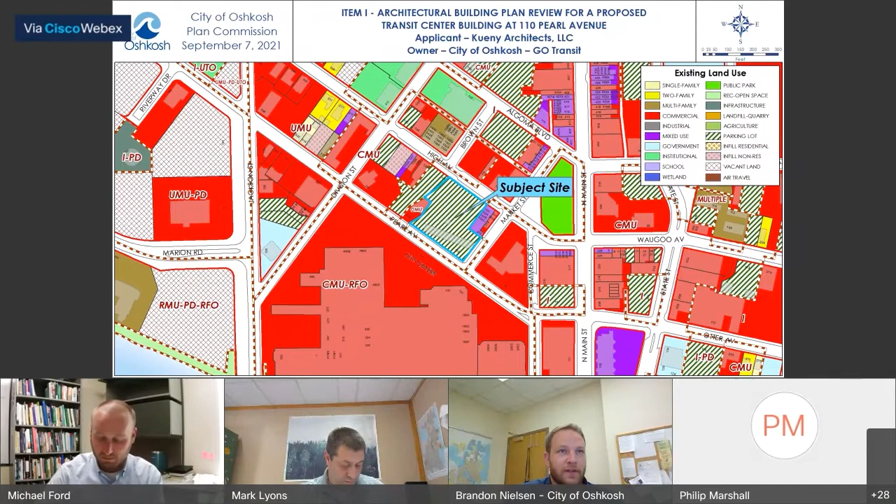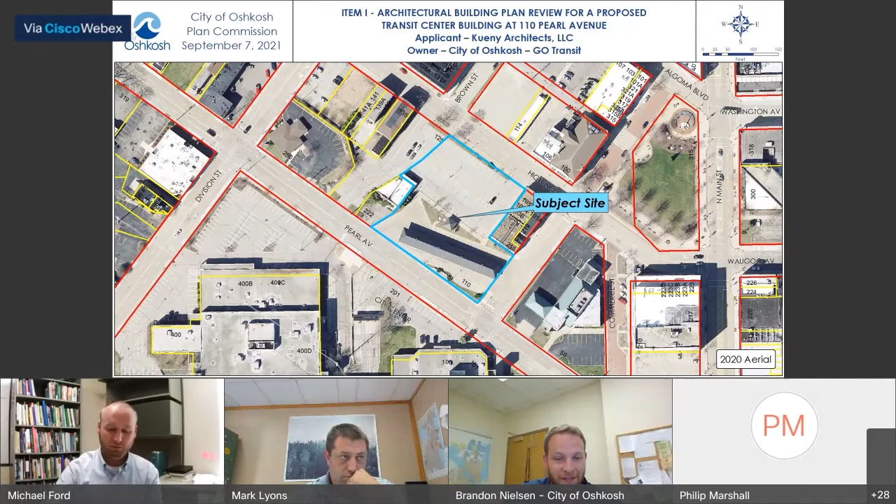Can you go to the next slide? We are looking here at the downtown transit center located at 110 Pearl Avenue. This slide shows you the subject site. Here's an aerial image of the area with the downtown transit center and the existing building that's there. In 1989, the city of Oshkosh constructed the current downtown transit center, which is the subject site we're looking at today. It's just south of High Avenue on the corner of Market Street and Pearl Avenue.

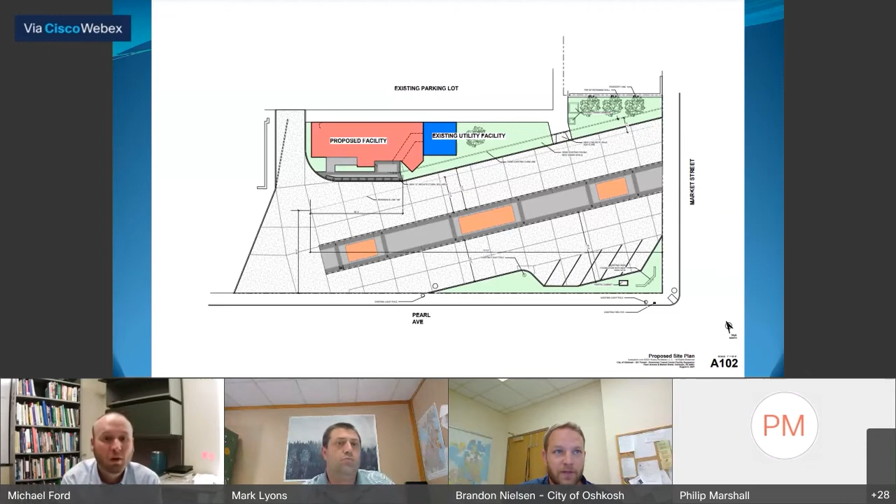The current building doesn't provide public restrooms, staff break rooms, or fare kiosks, and the new building we're looking at today provides all of those things. If you remember, on August 3rd, Plan Commission had a workshop with the architect and was supportive of the project. Now the applicant is requesting the formal architectural review for the proposed building.

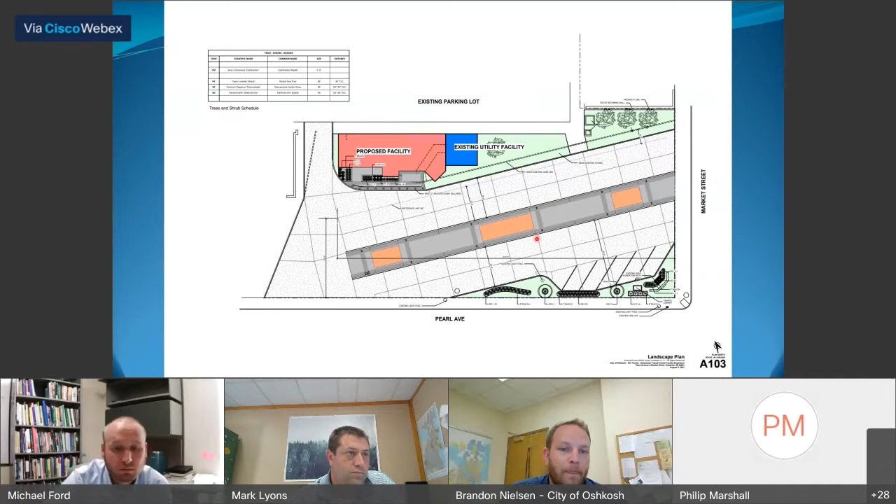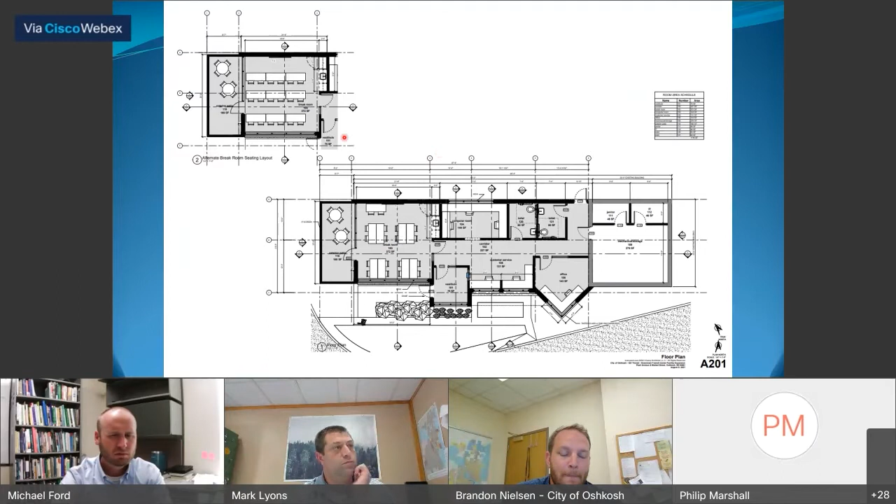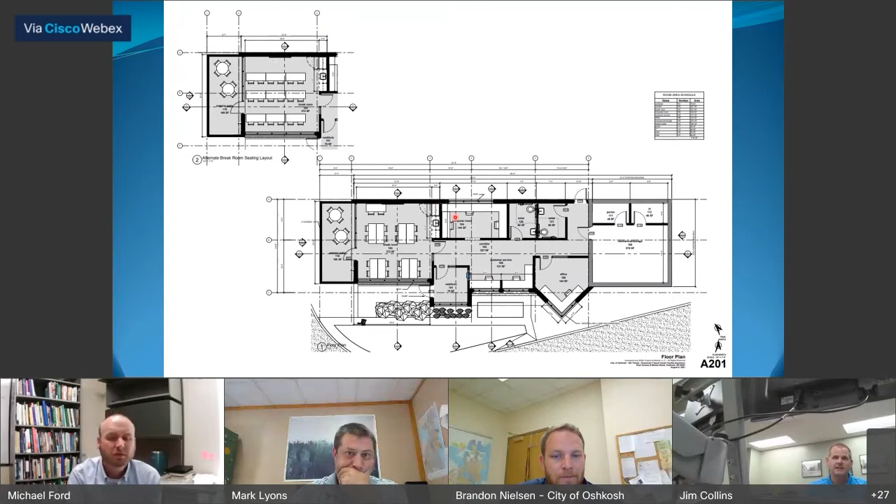Next slide. I've got John from Kueny on as well, but I just want to clarify they're not public restrooms, just 2 single-user staff restrooms. When we get to an expansion of our transit facility, that's something we'll evaluate again at that time. But with this, it's just not large enough, and there were some public safety concerns since this is such a small addition, to be able to have a safe area for that.

So currently it's staff restrooms and a little bit of break space, and then we'll have a customer service window area at the front. I just want to clarify that, because I know one of the reports misrepresented that as well. This building is a staff building, other than the customer service window. At some point in the future, we're still planning on having more of a public facility when we have more space available.

Thank you. I will make sure the staff report is updated, and if you could go to the next slide, please.

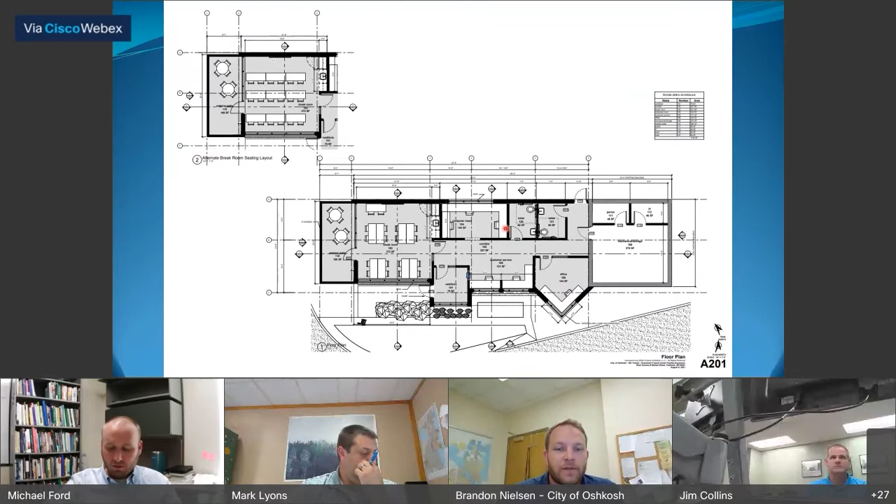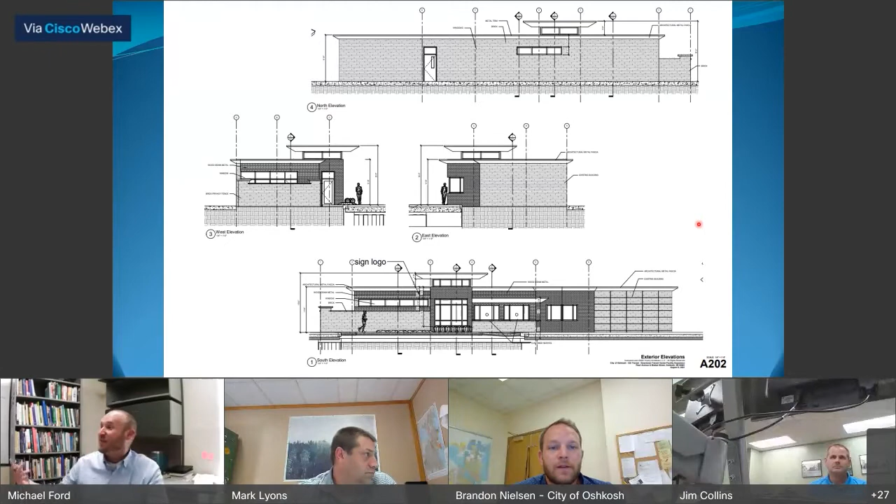So here are the building facades, showing mostly brick masonry units. The majority of it is meant to match, as close as possible, the existing brick from the downtown transit center. There are some color alterations of different masonry brick on different facades.

And the rest of it is mostly glazing. The architect was proposing a rubber low slope roof with aluminum trim to be silver in color. And again, if you remember from the workshop, they were going to apply some paint to the addition to the existing transit center to match that trim.

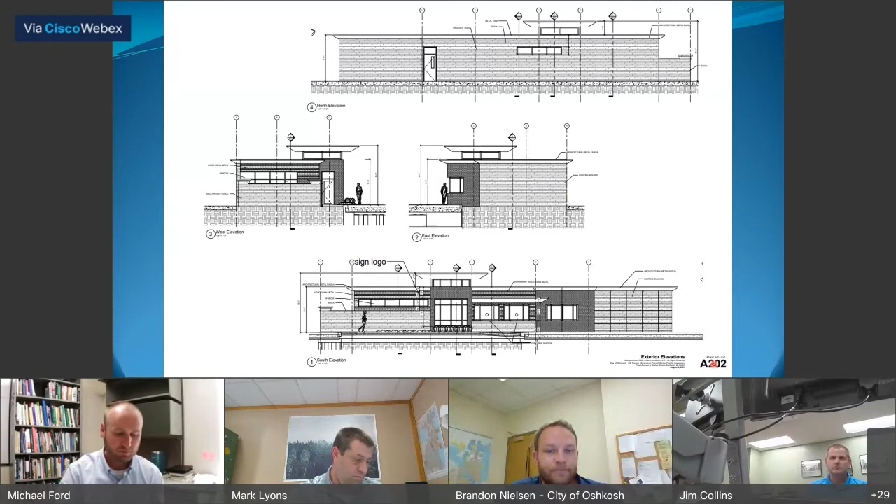Next slide. These are just some three-dimensional images. This one and the next slide are somewhat from the same angle, to get an idea of what it may look like.

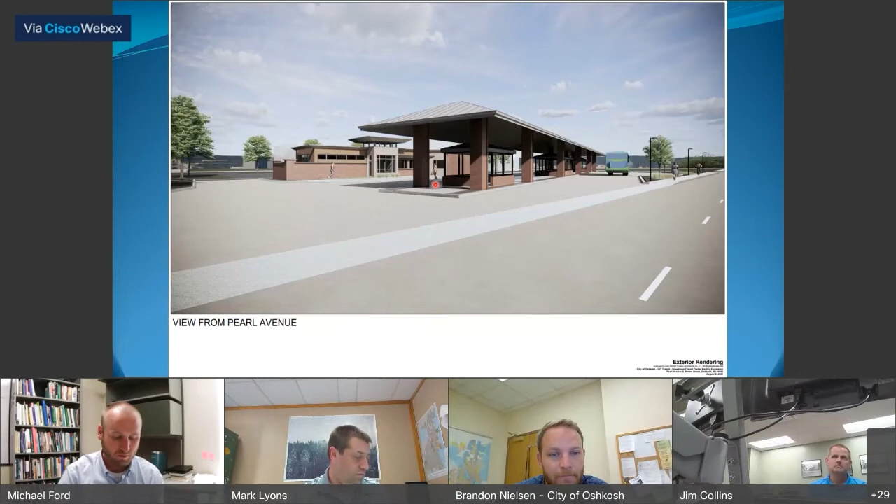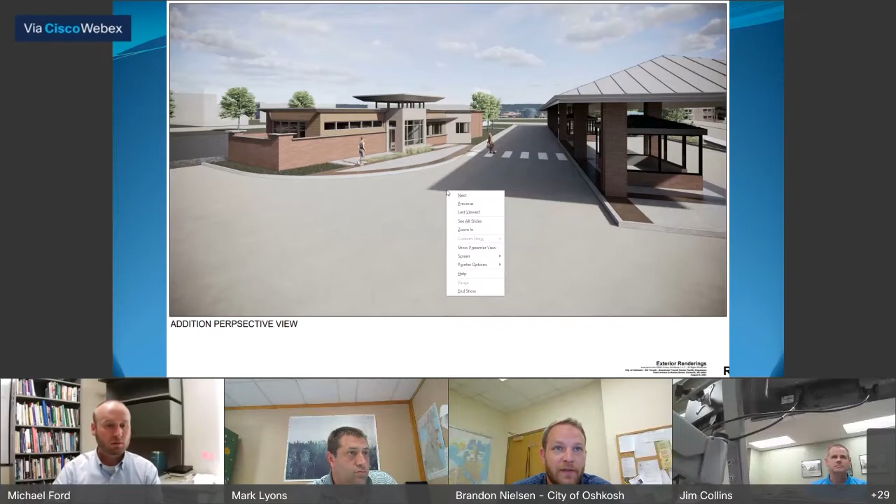And with that, staff believes that the new transit center building will not have a negative impact on the surrounding area, and the structure will be visually harmonious with the intended character of the general vicinity. Staff recommends approval of the architectural design of the transit building as proposed.

Thank you. Are there any technical questions from Planning Commission? Looks like I see Margie.

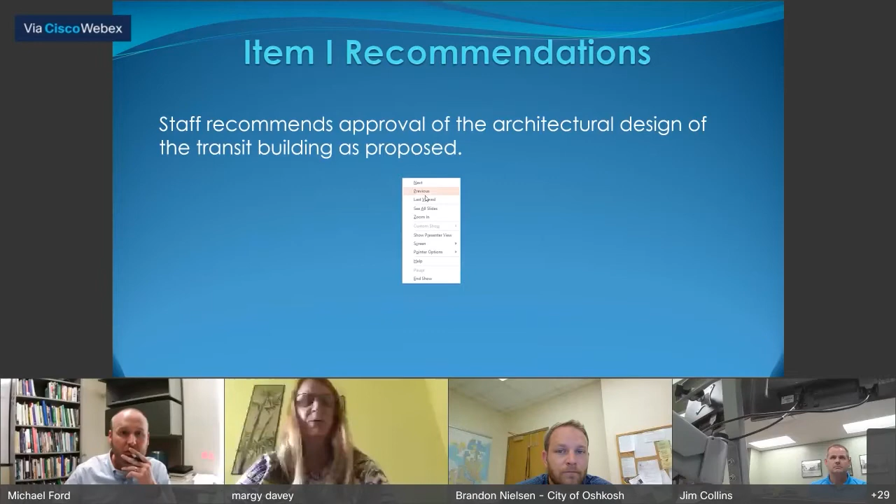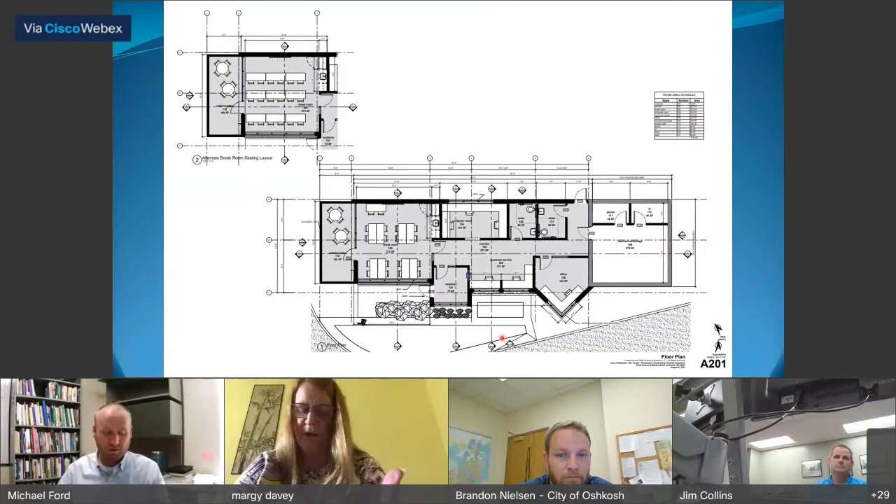Thank you, Mark. Yes, my question pertains to the landscaping that was called out in this. I believe they're showing maple trees, and I was curious if the planning department shares that page we have in the zoning that says there's some preferred trees that we don't use. Because six or seven different types of maples are listed in there, I just wanted to be sure the city forester or somebody was involved with choosing the landscaping there.

Yeah, during final site plan review, they'll have to specifically call out what variety of maple, because you are right. For example, autumn blaze maple are listed as overplanted and are not recommended. So when we get to that final step, they will have to specifically call out the exact species being planted. Okay.

Are there any other technical questions? It doesn't look like it, so we'll take a statement from the applicant.

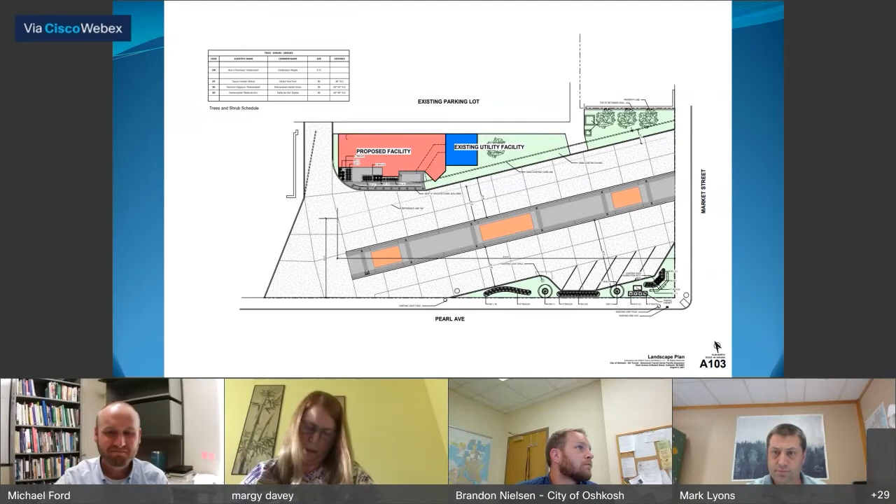So either Jim or John, either of you would like to add any comments? Yeah, Jon Wallenkamp, Kueny Architects. Just everything's been touched on. If there were any other technical questions, we're here to answer them.

Our goal is, as mentioned, to kind of enhance the building with the existing structure. That roof is pretty heavy on the existing structure, so that's really the reason for changing the color of that main roof. And we will for sure address the landscape species. But other than that, it's pretty simple. We're here for any questions.

Yeah, I concur with John if you have any technical questions for him, but just from a staff or transit perspective, we're excited about this. I know our staff and drivers are really excited about having at least some break room space down there, where they currently do not have any.

But I think this is also an opportunity for our passengers and the public as well, because it is going to update that whole area and make it look a lot nicer, as well as eliminate some tripping hazards and improve the safety of that area with upgraded lighting, improved pavement by replacing or removing those pavers, and doing some repair to the concrete. I think it's just going to be a real nice upgrade to that area.

And then, like I said earlier, hopefully at some point in the future we can do a little bit of an expansion and offer some more space for public waiting, and then reevaluate the public restrooms and things like that at that time. But we're excited for this. I think it's much needed and overdue, so we're fortunate to be able to do that at this time.

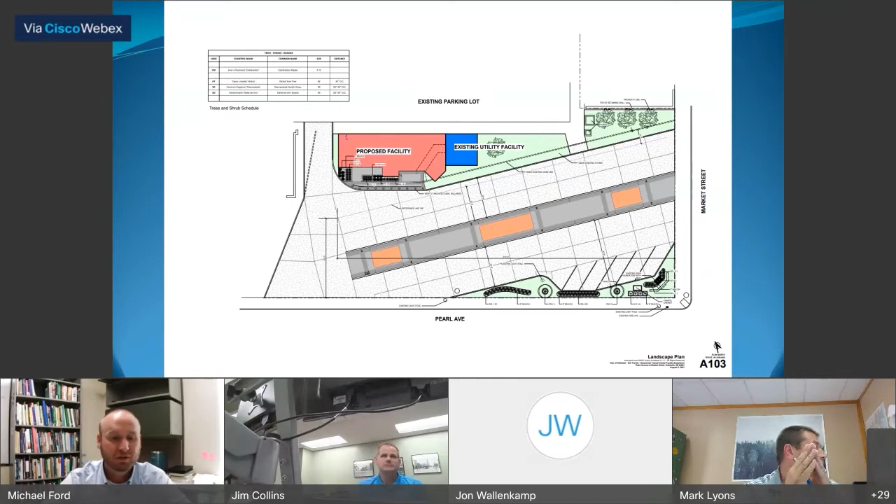Thank you. Any statements from the public? So just one thing to note, we do not use the chat for public comments. So if anyone from the public has questions or comments they'd like to make, now is the time. We are not able to use the chat to answer questions.

Doesn't look like there's any comments there. Is there a closing statement from the applicant? No, just thanks for everyone's time. Awesome. Thank you. Then the next thing we need then is a motion from the Plan Commission.

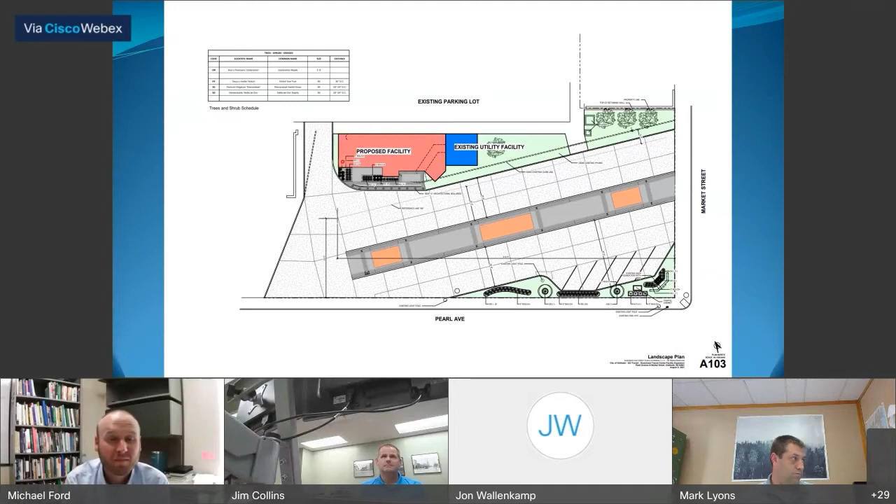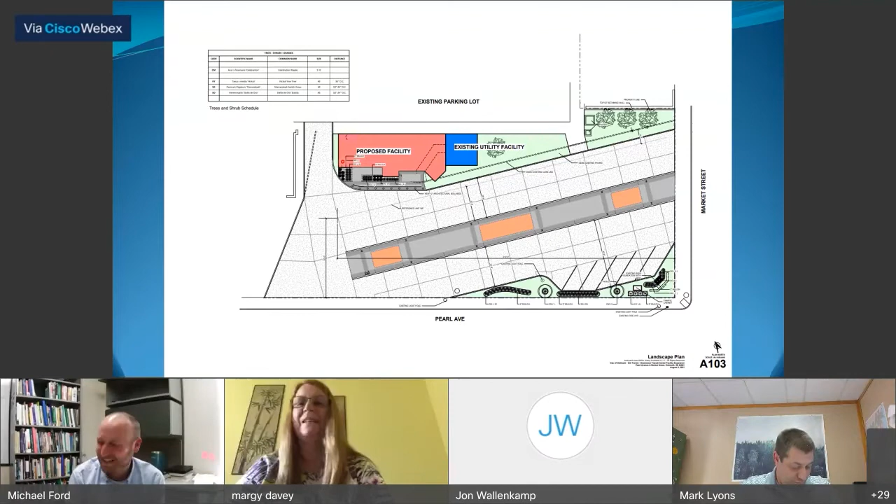I move to accept whatever it is we're supposed to say here as is, and that we do it. I second. So Margy, to clarify, Margy is motioning accepting the recommendations as stated in the staff report.

Is there any discussion? I've got 2 questions, and I'm not seeing where my hand raise button is. Go for it, Justin. What was the rationale for the limited initial phase and not including the public restroom and the other features that would provide a pretty valuable service to the users?

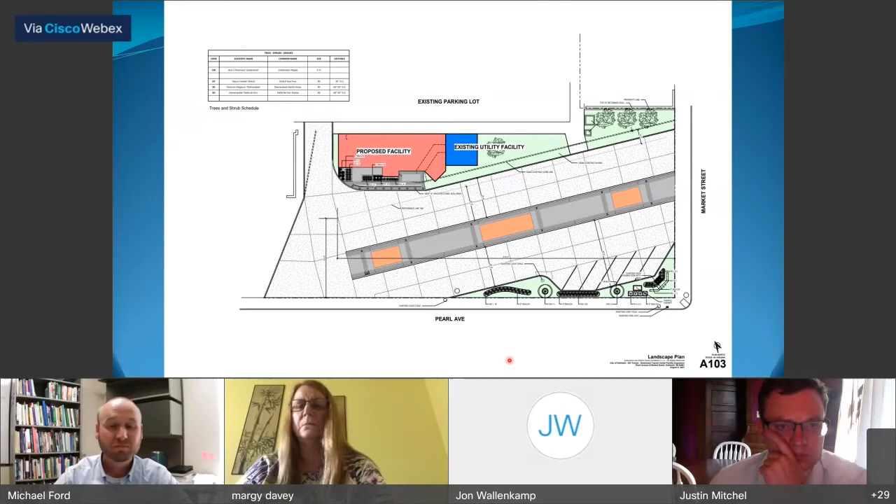I can answer, the limited scope is due to funding. We got a limited amount of ARPA funds, so this is what we were able to do on our current site. We're limited currently to our existing footprint. We don't own any of the land adjacent to there, so basically we're limited to what we currently have as far as a footprint goes. And specifically, that space constraint just doesn't allow us much room to do anything more than we proposed here. So I think that answers your question. I don't know if you have anything more.

Is there a staff restroom? Yes, there'll be 2 single stall staff restrooms currently. That's what they have there currently as well.

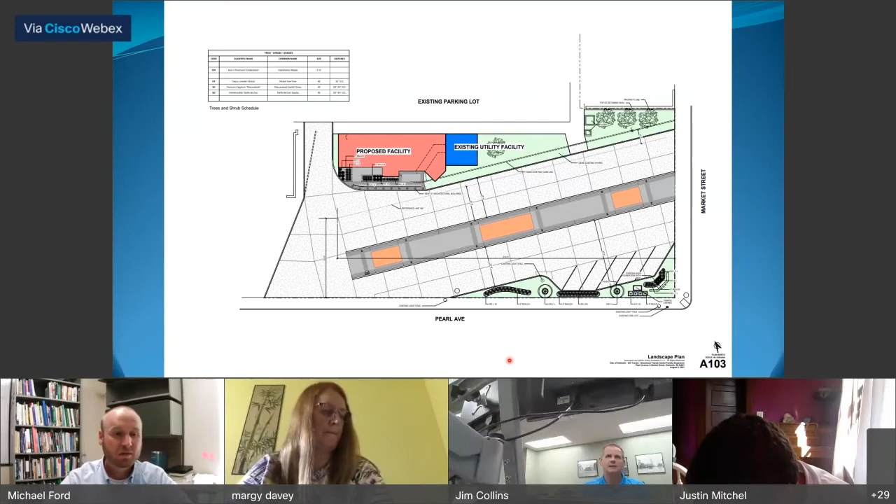Just at a minimum, I'd like to note that it's disappointing that that's not being included in some phase. And I know that was part of the initial discussion that we had, that there would be some public restroom features and whatnot. My other question is then, and if you went over this, please accept my apology, I had to re-log in. What was the user engagement for the development of this plan? Did we host sessions that were specifically targeted to users, or do we hand out material to users explaining how they can provide feedback and whatnot?

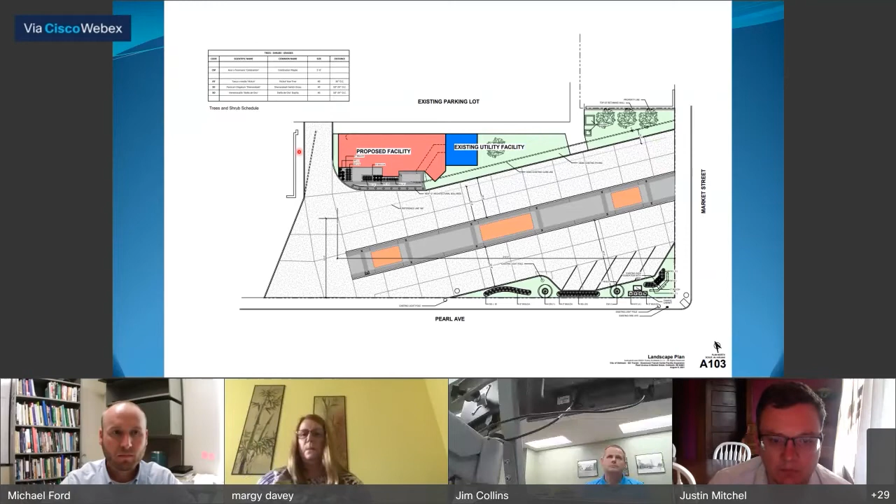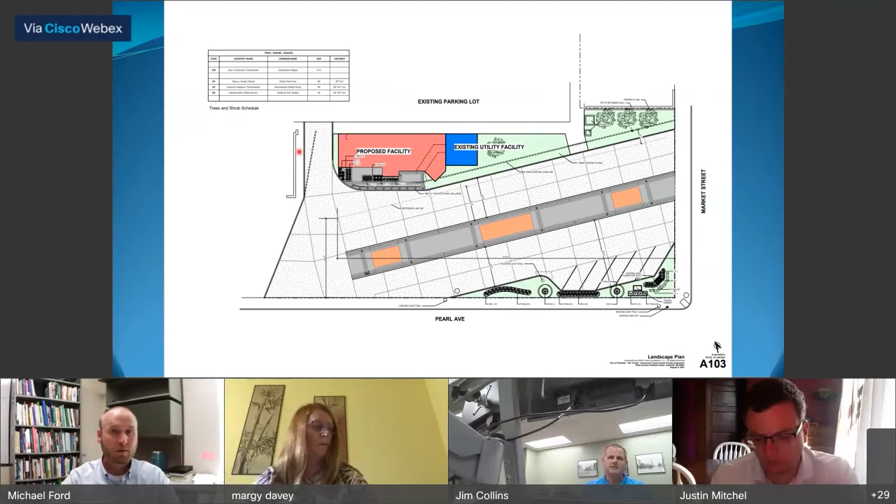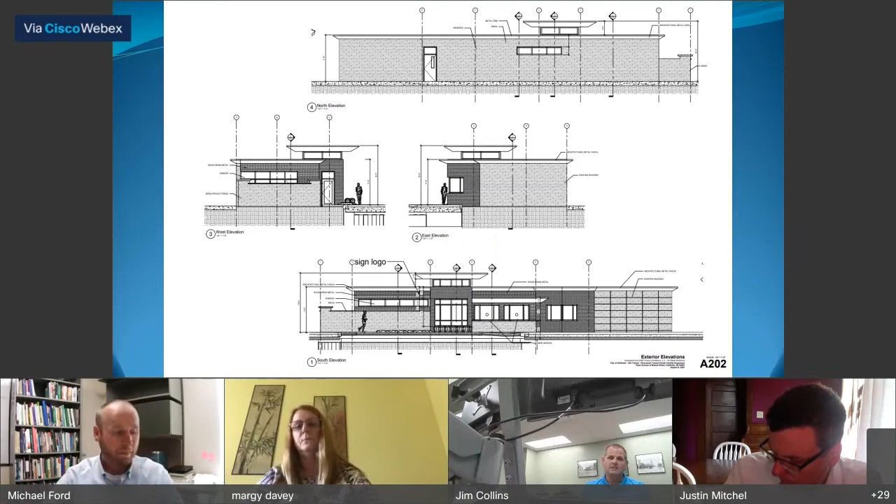Yep, so I think we're getting this confused a little bit. We did do a site selection study over the last 2 years. So there was a transit site selection study that was done, and that was prior to receiving any ARPA funds. But over the last 2 years, we had a company called SRF Consulting that did a site selection study. And at that time, we were looking at where, if we ever did expand, where would be the best location for that. So they looked at a number of different locations throughout the city of Oshkosh, not just downtown, had lots of stakeholder meetings, public meetings, and then also ultimately had the Transit Advisory Board and then council evaluate the recommendations, which were to stay on the current site due to basically cost considerations and the fact that any money we invest in transit has to be in use for 40 years as far as public buildings. So that was a 2-year process where there was a lot of engagement.

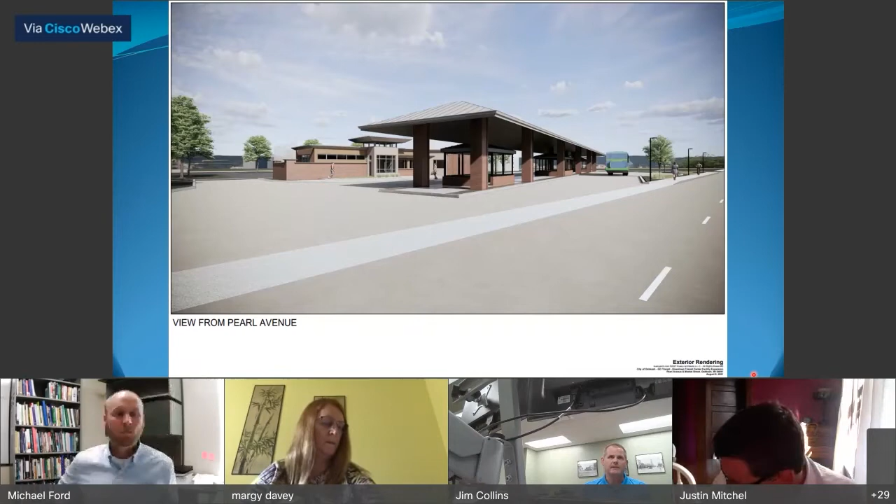And then COVID hit towards the end of that study. And then we were notified we were going to receive some ARPA funds at the beginning of 2020 as the pandemic started. And we used those for a lot of COVID mitigation strategies. And then as we started winding those down, we had some extra funds or some funds available yet. So we started looking at what we needed immediately to help us, not only with COVID, but just for upgrading our current site. And that's what led to this plan. And there were opportunities, there's been a couple of meetings we've had with Plan Commission, and then we've also presented this to the Transit Advisory Board, and there's always opportunity for public comments through those. But this was the result of being able to have those funds and then figure out what we needed immediately. And again, it's a limited amount of funds, so we did the best we could with those funds to come up with this current plan.

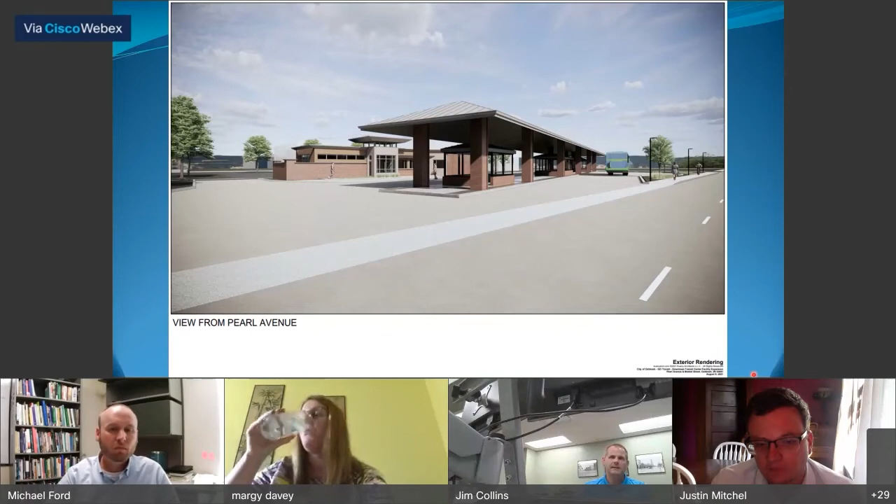And again, to address the public restrooms, we did consult heavily with public safety, and they do not recommend public restrooms. They said it's a real safety concern for both the general public and the users, unless you can have an open building that is staffed whenever the restrooms are open, so that if there's any incidents they can have easy access to that. And we just don't have the room for it. So they recommended heavily that that's not included until the time which we can have sufficient space to do that. And then there's pluses and minuses with it, and we'll have to evaluate that again at the time when we have the space and the funds available for something like that.

One quick follow-up, thank you for that explanation. That makes sense. So this is what you're saying is phase one. There was considerable planning involved in the location, maybe not so much the design and amenities due to timing, but you're planning on coming back with maybe local invested funds at a later date. And at that time, is there a plan or general idea for engaging users in feedback?

Yes, those are good questions. I think you're correct on the first half, and we do have a couple different options for expanding the transit center downtown. Cooney, the architect working with us on this plan, has helped us put together a couple different ideas. They're ideas at this point, because in order to expand beyond our current location, it's going to involve acquiring other land and/or property, which is a pretty involved process.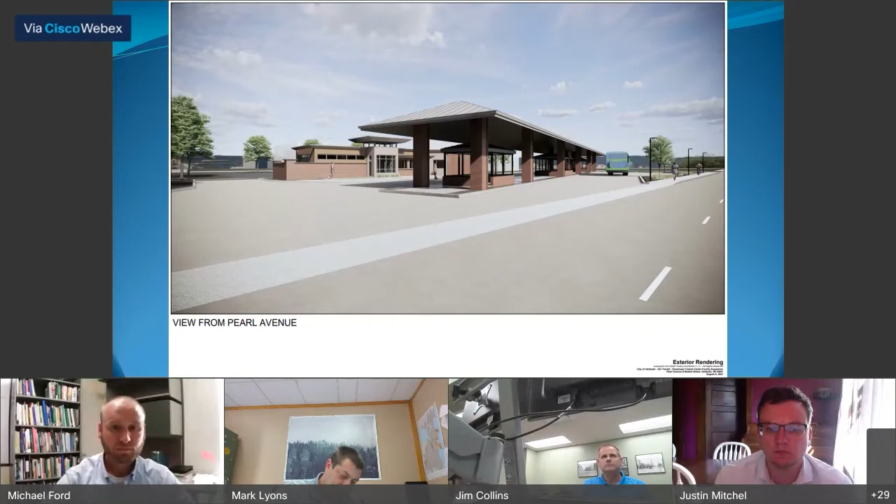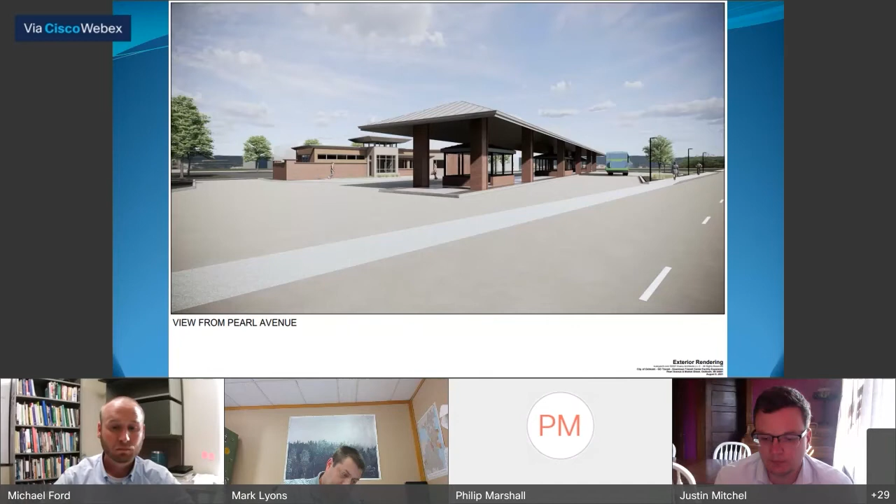Mr. Groth, Aye. Mr. Kiefer, Aye. Mr. Mitchel, Aye. Mr. Perry, Aye. Mr. Marshall, Aye. Mr. Coulibaly, Aye. Miss Davy, Aye. Mr. Propp, Aye. Mr. Ford, Councilmember Ford, excuse me, no worries, Aye.

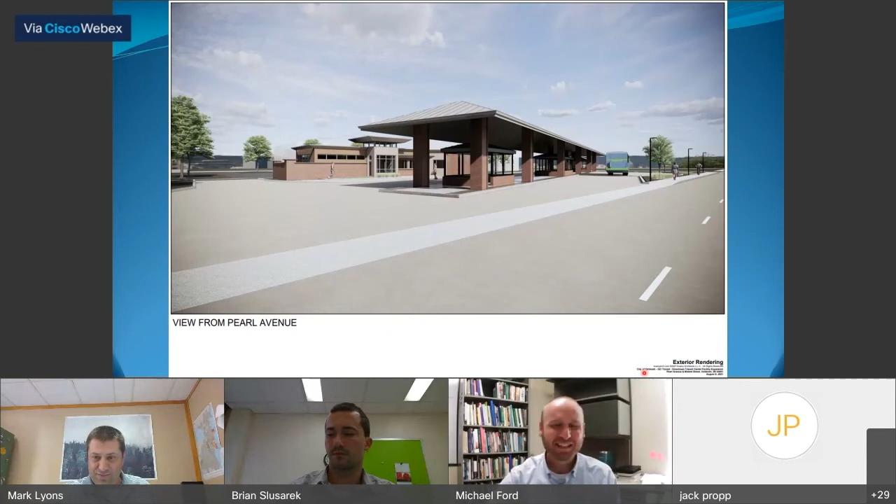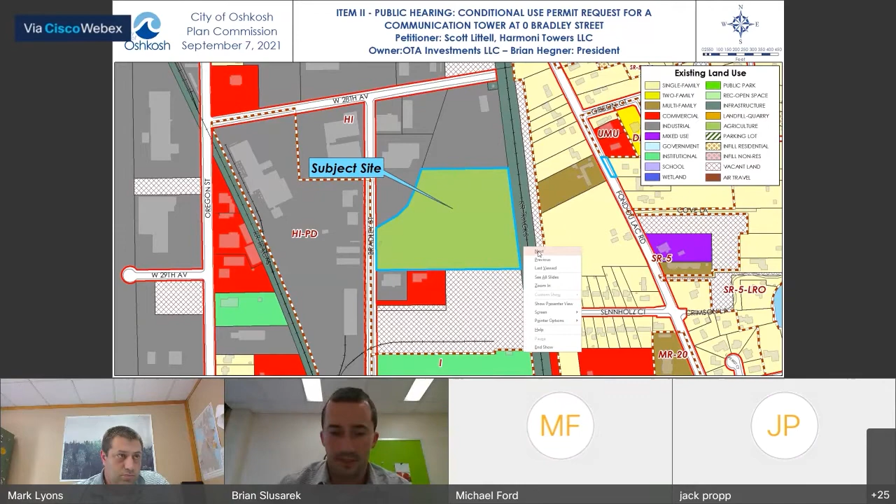Next slide, please. So here's an aerial view of the subject site.

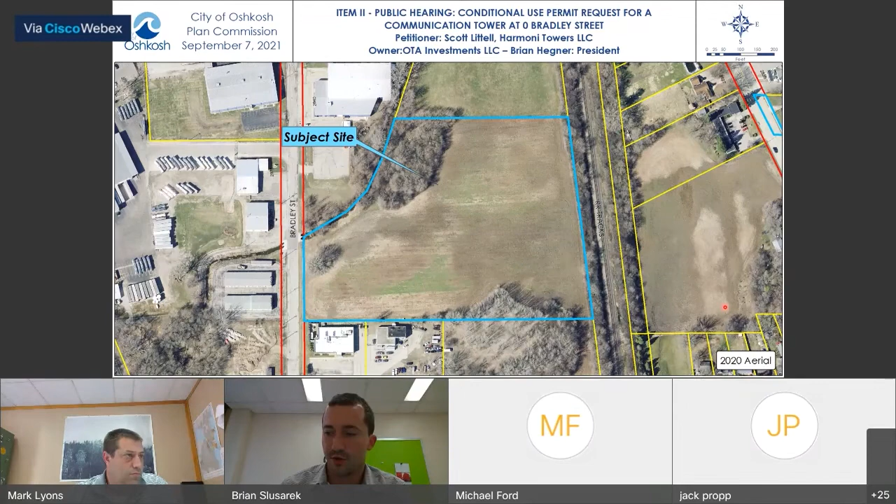The applicant is proposing to install a cell tower up to 136 feet tall. Cell towers require a conditional use permit within the heavy industrial district.

The cell tower will be accessed from Bradley Street with a 12-foot wide access drive, and the tower and associated equipment will be enclosed within a 50-foot by 50-foot fenced-in area.

The location of the cell tower and height is meeting all applicable requirements of the zoning ordinance. Also, the tower height has been approved by the FAA.

The plans also include 6-foot tall solid fencing around the cell tower and equipment to meet code requirements for buffer and screening. As far as landscaping, street frontage landscaping is required.

The site plan shows two existing mature trees along the Bradley Street frontage that appear to be meeting the code requirement for street frontage landscaping, and that can be verified during site plan review.

As far as paved areas, it's also showing existing mature trees near the proposed paved areas on the site, and that also appears to be meeting the code requirement for landscaping points for paved areas.

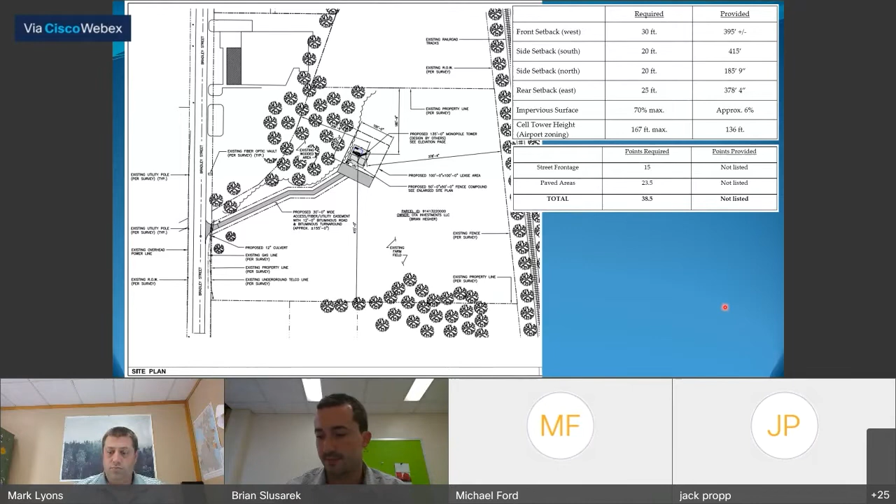With that, staff recommends approval of the conditional use permit for the communication tower at 0 Bradley Street, as proposed, with the findings and conditions in your staff report.

One additional comment, just because this came up at a previous Plan Commission meeting where we were discussing cell towers: the applicants did provide the necessary co-location documentation and statements as required by the code.

Okay, I'll open the public hearing then. Oh, technical questions first. Any technical questions?

I've got just one. It's Justin. Was that Justin that had one? Yes. Yeah, go ahead. Thank you.

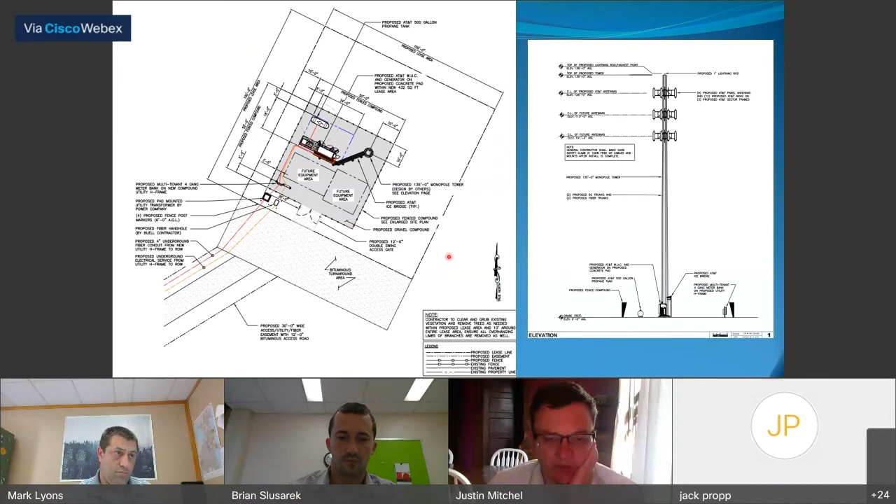We've had a couple different cell towers, and I'm just curious if there is a broader city or regional plan, or some kind of monitoring in place that looks at a broader picture beyond just one lot.

Yeah, so cell towers are highly regulated through the federal government in terms of location and a local municipality's ability to get involved in the placement of them. They do have to provide documentation to us that they have evaluated co-location options in the area before siting a new tower.

They did provide that documentation, but the federal regulations in these instances pretty much trump everything of what they're required to provide to us.

Thank you. Just more so, less about the requirements of the federal government and more so for our own purposes.

I don't know, a comprehensive communication system, access all across the city, whatnot. Is there any sort of plan related to our communication systems and whatnot?

Again, no, because of the way it's regulated, it's not something the local government can get involved with. We are allowed to require a conditional use permit and go through this process, but no, the city does not have any cell tower plans or anything like that. It's not something that we get involved with because of the way they're regulated.

We have a map showing where they are. That's about it. And again, if they're able to demonstrate an inability to co-locate, the state and federal laws do say they are permitted to build a new tower. Thanks.

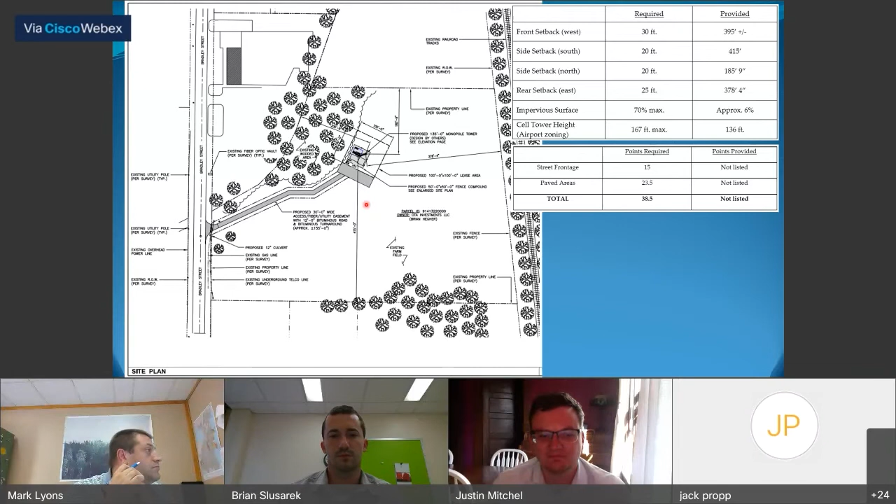Any other technical questions?

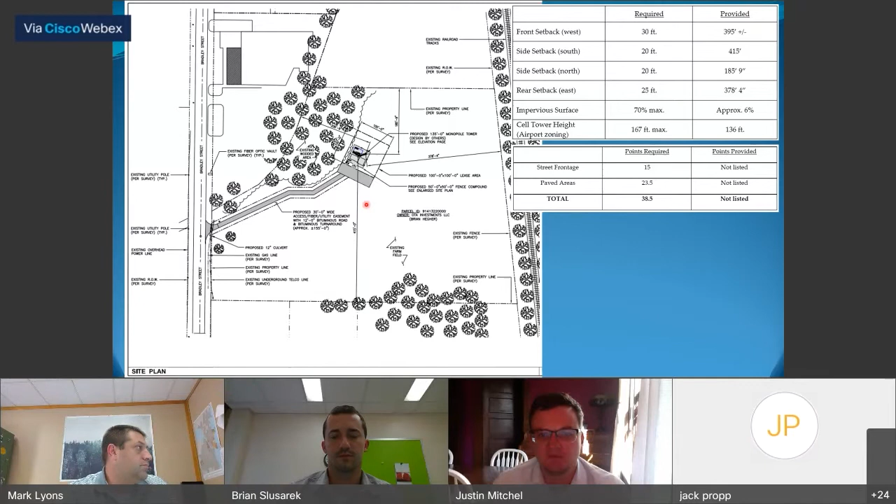Yes, I was. I can see that the structure itself is quite isolated in the lot, and there is a good buffer zone between that and the surrounding neighbors.

But I was just wondering, are the neighbors still being notified and consulted in any way for the structure to be put in place?

Yep, they are notified similarly to any conditional use permit where we do send that notice out to neighboring property owners.

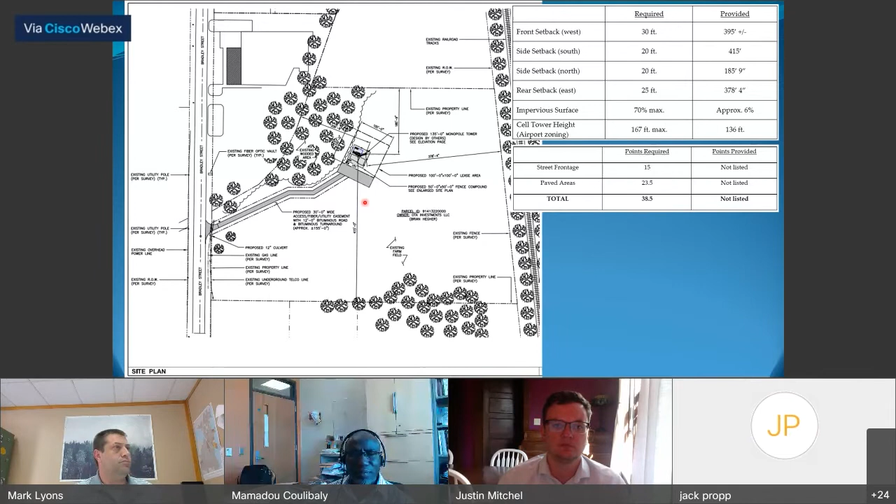Anyone else with technical questions? I'm having trouble seeing any hands on my computer. Yeah, no other technical questions, it looks like.

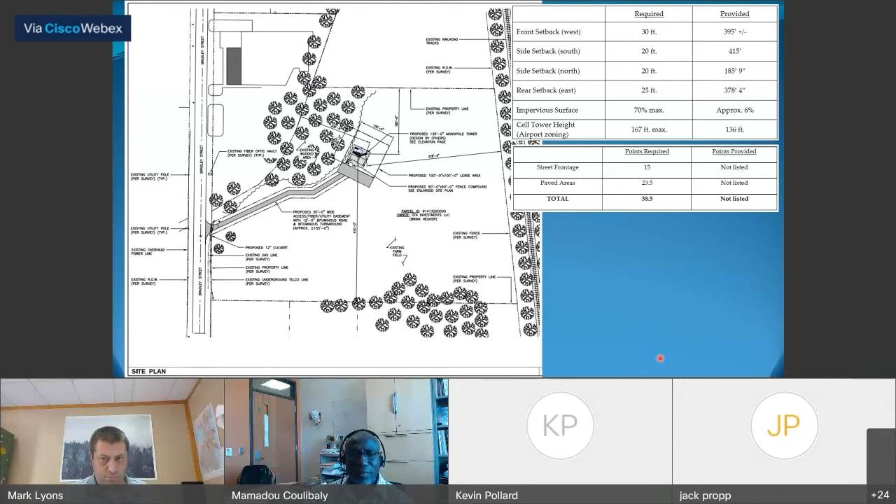Okay, then we'll open the public hearing and request a statement from the applicant if the applicant is available.

Good afternoon. Can you hear me all right? Yes. My apologies, I can't seem to get the video going, but at least you can hear me.

My name is Scott Littell. I'm the petitioner on behalf of Harmony Towers and the landowner, Brian Hegner.

Harmony Towers has petitioned the Plan Commission for a conditional use permit for a 136-foot tall monopole tower on Bradley Street. We feel this is an ideal location.

It is zoned heavy industrial. The surrounding properties are heavy industrial for the most part.

It is screened by mature trees, and it is also close to residential areas, a driver for cell phone carriers to be on the tower.

And we've also complied with the requirement of having other places for co-locators to locate on. With that, I'd be happy to answer any questions.

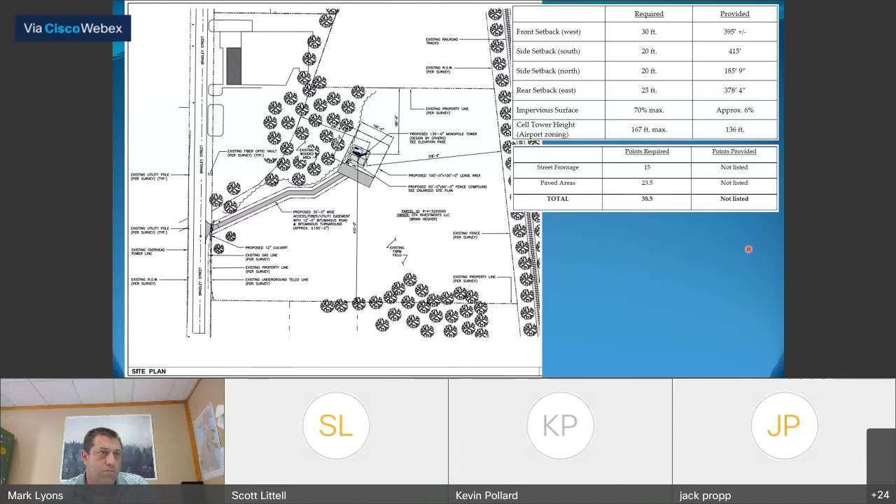Are there any questions? Are there any questions, Mark? I'm not seeing hands. From Plan Commission, it looks like Miss Davey has a question.

All right, Margy? I'm just curious, I see that this is currently being used as rented agricultural property. Are they still going to be allowed to farm around the rest of this plot?

Yes, Ms. Davey, they will be. Okay, thanks.

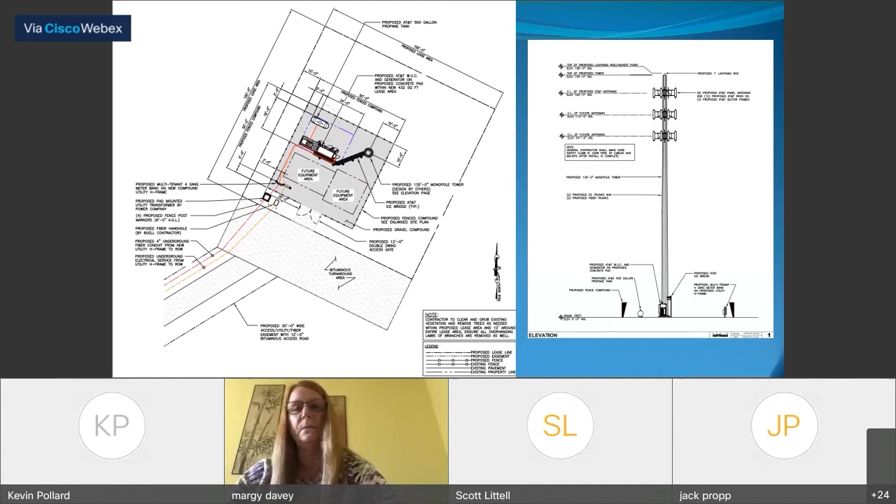Any other questions from Plan Commissioners? Evidently not, Mark, unless you can see someone. No other Plan Commission member questions.

Okay, then I'll ask for additional public comment. Is there anybody else on the call that wishes to speak to this matter? I see an Andrew Flowers.

Hello, go ahead, Andrew. Able to hear me? Yes. All right, excellent. My name is Andrew Flowers. I am the Senior Real Estate and Construction Manager for AT&T Mobility.

I wanted to weigh in because Harmony is our vendor that is in the process of seeking this CUP from Oshkosh, and let you guys know why we're requesting to build this particular site. Last year, Oshkosh gave AT&T the ability to build another new tower on EAA's property, which turned out to be a great asset for their event that they just had.

One of the items we have here at AT&T is a long-term strategic plan to keep increasing the capacity and coverage of the EAA event and surrounding community throughout the year. This facility will allow us to do that. It sits just to the east of the airport and will be used heavily during EAA events and will be available for the rest of the year for the rest of the community.

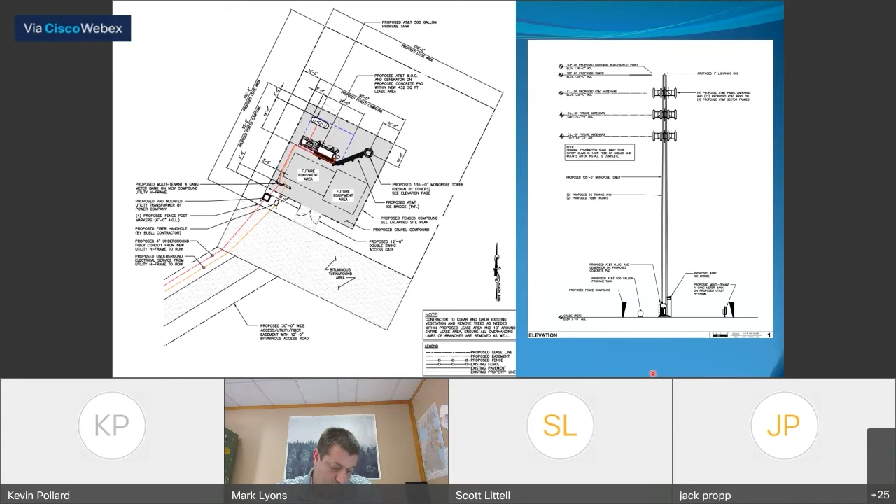AT&T has not sought any reduction in rent or modifications to the existing lease on this tower. In fact, they completed an upgrade amendment and added additional equipment just in 2019. The statute also requires that an applicant seeking to construct a new tower evaluate the feasibility of co-location on an existing tower. So we certainly don't think they've done that.

They haven't contacted SBA saying, hey, we have issues with the existing tower. And I was intending to submit a radio frequency coverage comparison, which we will provide after the hearing, showing that the coverage is essentially the same on either tower. And so that goes into the—

Other part of our objection, which is the city ordinance. One of the factors in conditional use permits is whether the potential public benefit outweighs potential adverse factors or adverse impacts. And really, since there already is a tower there, there is essentially no public benefit to adding a second tower.

Again, the statute and ordinance is designed to prevent this type of clustering, so you don't end up with a bunch of cell towers stacked right next to each other. There's obviously adverse visual effects, adverse effects on property value, and potential for interference.

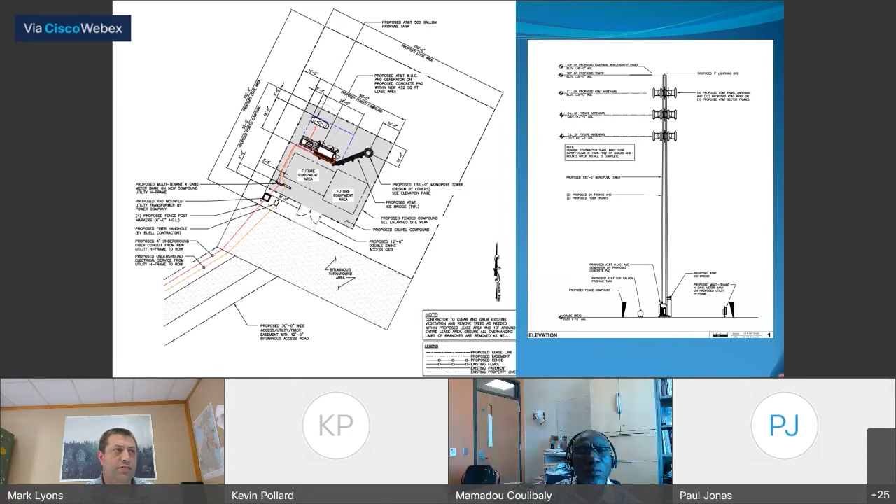I guess, Scott Littell, are you part of the applicant? Yes, sir. So in closing, we meet all the requirements, in fact exceed the requirements as put forth in the ordinance for a conditional use permit for this tower. With that being said, I would like to respectfully ask for your approval of the CUP today. Okay, thank you. Thank you very much.

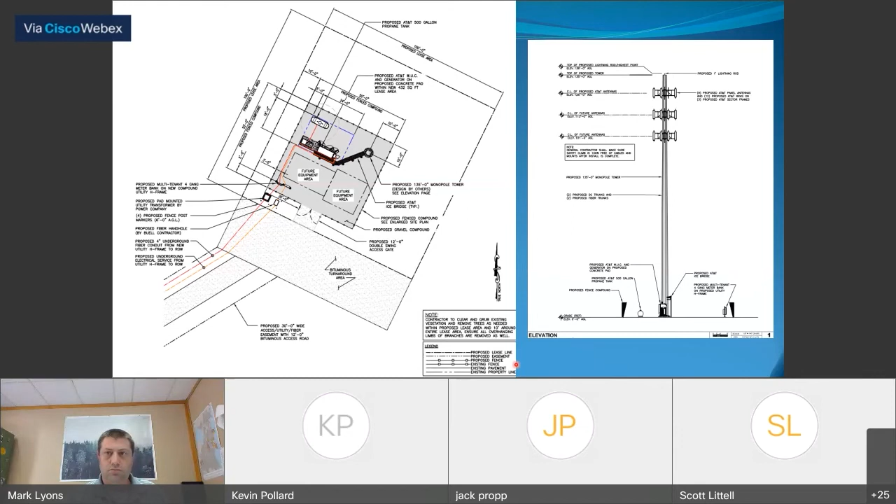We'll close the public hearing then, and back to the commission for a motion. Justin, make a motion to adopt the recommendations and findings as stated in the staff report. Second. Okay, discussion, Commission? Yeah, I've got a question, Kathy. Sure, go ahead. Mark, this is I don't know, maybe the third tower that has come up in my term,

and it seems that each time there is what plays out to be some sort of legal trial of sorts as to the merits of it, but at the same time staff says that there's nothing we can do. So I'm wondering if there's a step that could be added to this process that requests these sort of statements ahead of time, and then they get included into the packet, or some sort of step that eliminates the idea that we are somehow interpreting a law that you say we don't have the ability to interpret. It seems like a weird position that we're in on this.

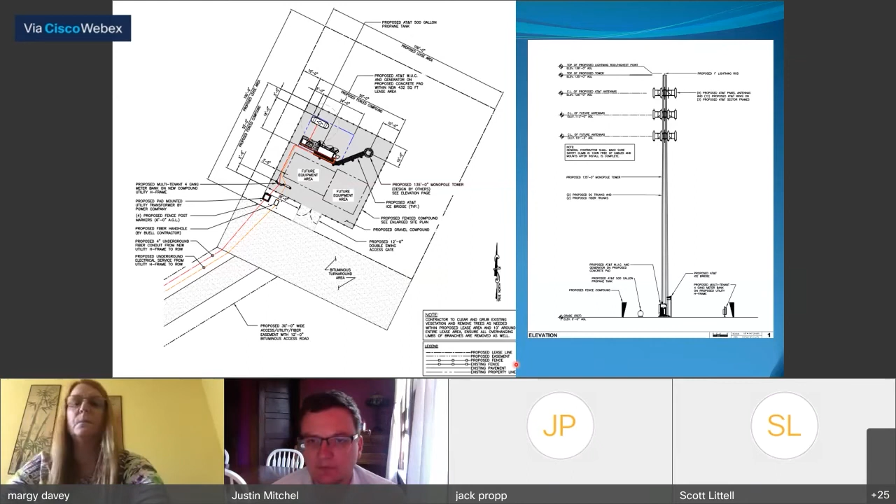Yeah, so I can say this. We've discussed this with our attorney's office during prior towers similar to this one. And the answer I've gotten from them in our review is the documentation that we need has been submitted, which is why we are recommending approval of the tower to you. I'm not sure what additional information would help, it's a situation where regardless of what we get, you are going to have competing tower companies that likely come before you to make an argument of their opinion of the case. Our interpretation as the planning office, in review of the documentation, is that they do meet the code requirements, which is why we have recommended approval to you.

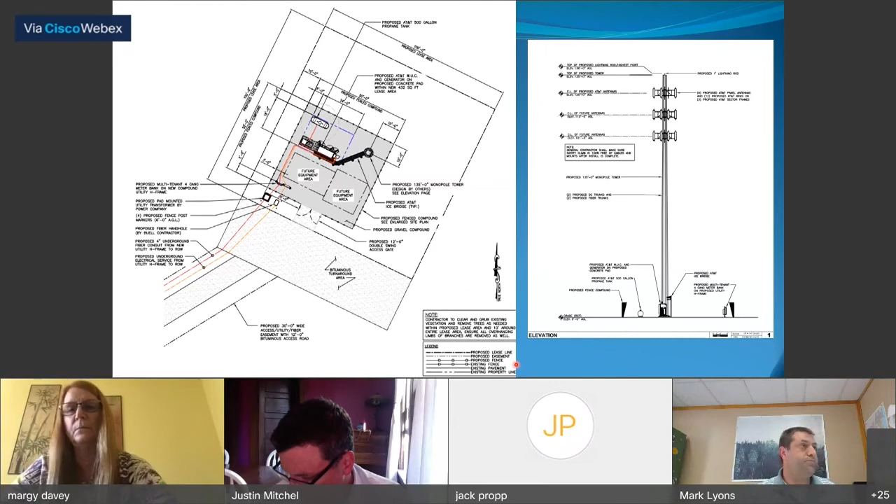Any other commissioners with questions, comments?

Well, I guess I have one. It seems to me that this is something that might end up going to the courts if these two companies, if the city approves this application and there's still a dispute. I'm wondering if that's the ultimate solution, Mark. Yeah, if either entity would choose to challenge it, they are within their rights. We feel as a municipality, we have done our due diligence and our appropriate review. Okay.

Any other plan commissioners with comments or questions? Kathy, I've got one more if I can go. This is Justin. Sure, go ahead. Is there ever a scenario where proximity to existing towers makes any difference to the city?

Ultimately, if documentation can be provided that those three criteria we've discussed over the past half an hour are relevant, staff under our reading of the ordinance would still recommend approval to you. If they failed to do that, then I think we are well within our rights as a municipality to recommend denial. But if they have gone through and done their statutory requirements, we would recommend approval of the tower. We have no basis for recommending denial at that point.

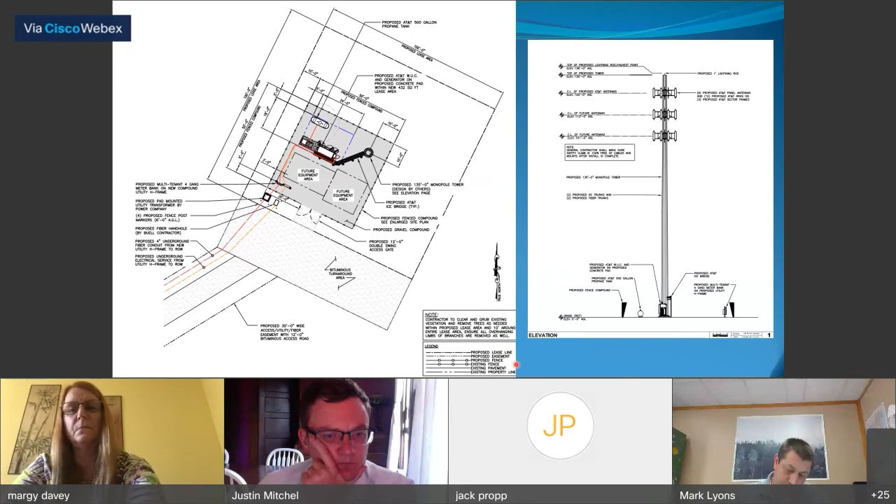Mr. Ford. Aye. Mr. Gross. Aye. Mr. Kiefer. Aye. Mr. Mitchel. Aye. Mr. Perry. Aye. Mr. Marshall. Aye. Mr. Coulibaly. Aye. Ms. Davey. Aye. Ms. Prop. Aye. Motion passes 9-0.

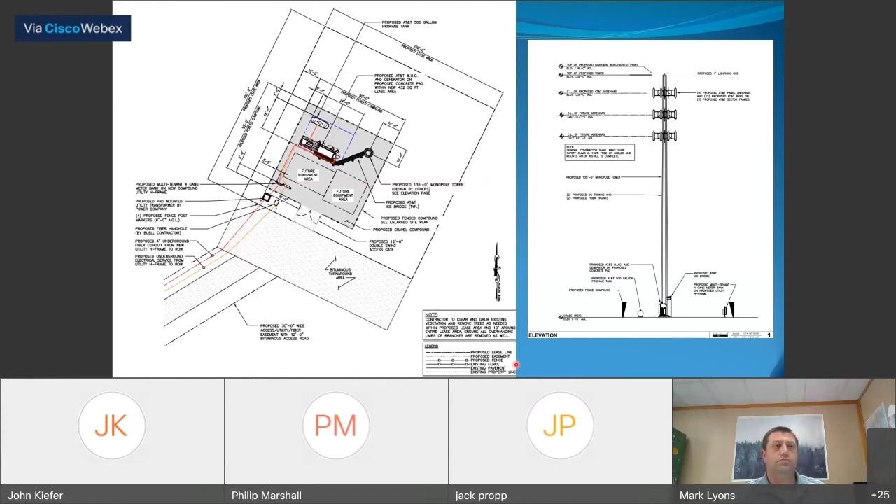Okay, we'll go on to item number 3, specific implementation plan amendment for a drive-through lane addition at 1580 South Koeller. Any site inspections?

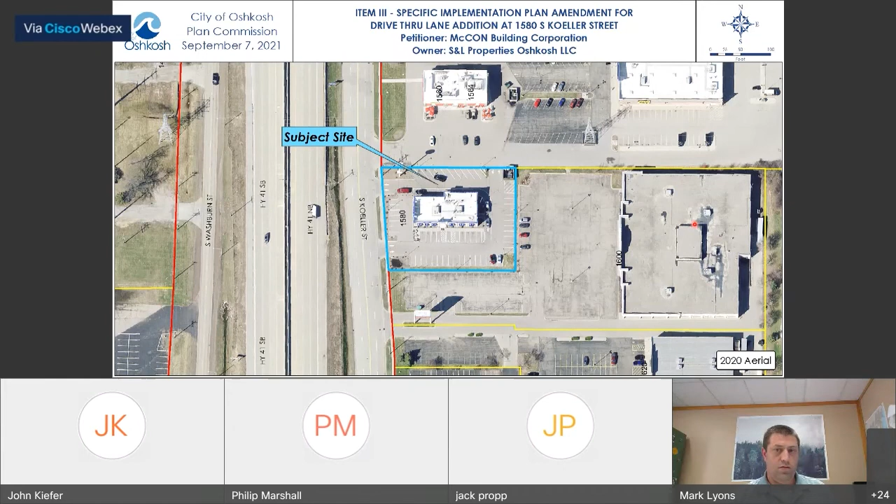The chair will accept the staff report as part of the record. Go ahead, staff. Thank you. So the subject site is located on the east side of South Koeller Street. It's zoned suburban mixed use with a planned development overlay. It's used as a restaurant with a drive-through, which is Culver's, and the surrounding area is commercial uses.

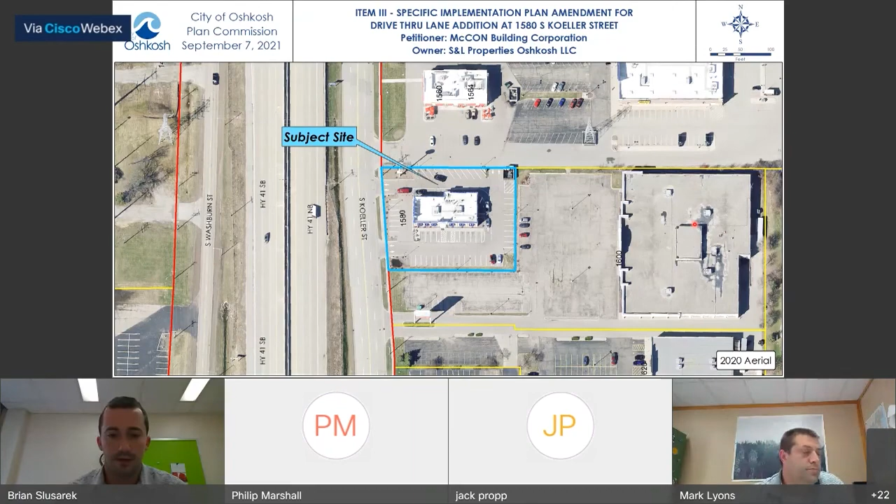The applicant is proposing no changes to the use of the site. The only change they're proposing is an addition to the existing drive-through. Next slide, please. So the drive-through lane will be on the rear east side of the building, on the outside of the existing drive-through lane, and it will provide an additional 6 stalls of stacking for the drive-through. It will result in the loss of 11 parking stalls along the rear east property line. However, the remaining parking stalls on the site still exceed the minimum parking requirement for the district and size of the building. And there is still sufficient space for one-way traffic around the drive-through to get around the building to the north side of the site.

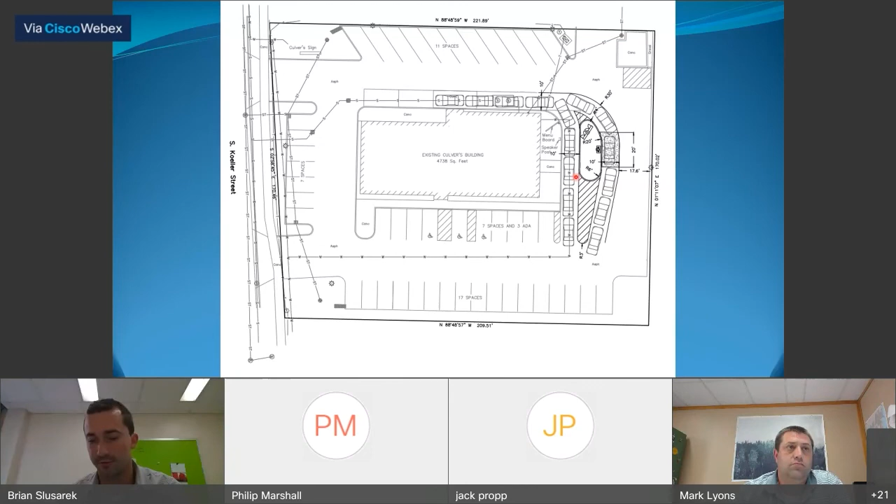The applicant also needs a BSM for the increased drive-through sign size. Code allows a maximum size of 24 square feet for drive-through signs. As proposed, it's about 46 square feet. The applicant has noted that this is the standard size for all Culver's menu boards nationwide, and it is needed to provide complete product identification and maintain efficiency for the drive-through. So staff is again supportive of this BSM for increased size, as it is needed to accommodate the full menu and support efficient use of that drive-through. And also the additional landscaping serves to offset that. So with that, staff recommends approval of the SIP amendment with the findings and conditions in your staff report.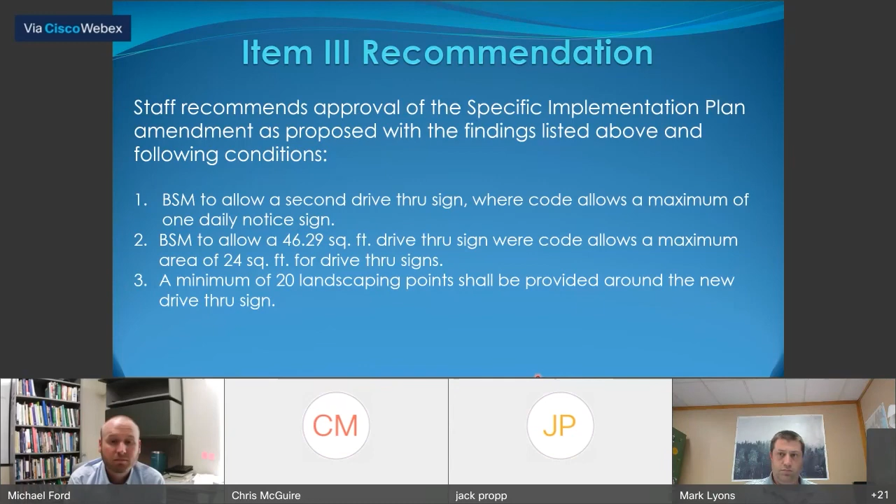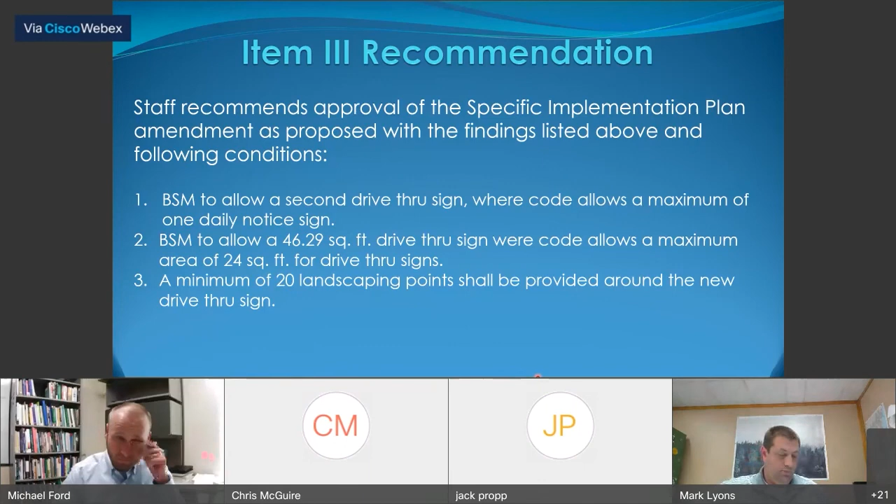Anyone else from the public that wants to speak on this drive-through request? Anybody else wishing to speak? Are you seeing any, Mark? I do not see anyone else. Okay. Then we'll close public comment. The applicant has just spoken, so he need not give any more statements unless he wants to.

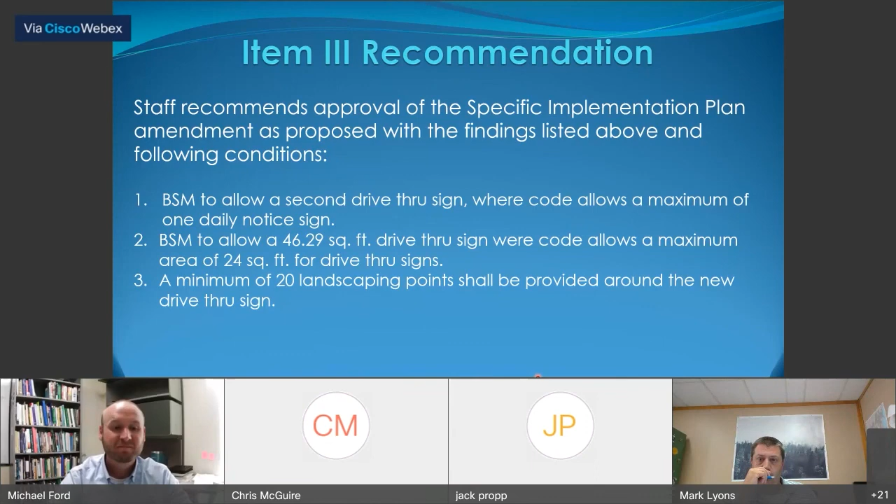Back to the commission for a motion. I move to adopt the finding and recommendation as stated in the staff report. I second. Discussion. Any discussion from the commission? Again, I'm not seeing any. If there is no discussion, we'll call the roll.

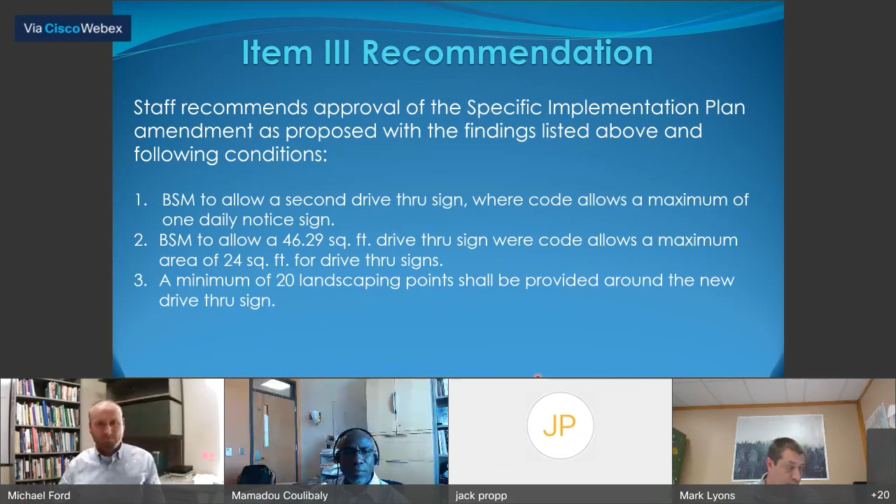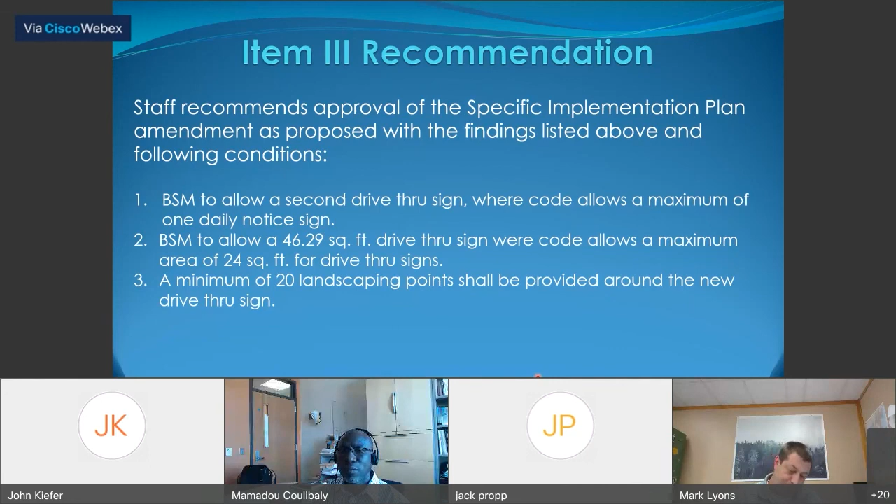Councilmember Ford, aye. Mr. Groth, aye. Mr. Kiefer, aye. Mr. Mitchell, aye. Mr. Perry, aye. Mr. Marshall, aye. Mr. Coulibaly, aye. Ms. Davy, aye. Mr. Propp, aye. Motion carries 9-0.

Thank you. Is there any other business to come before the commission before adjournment?